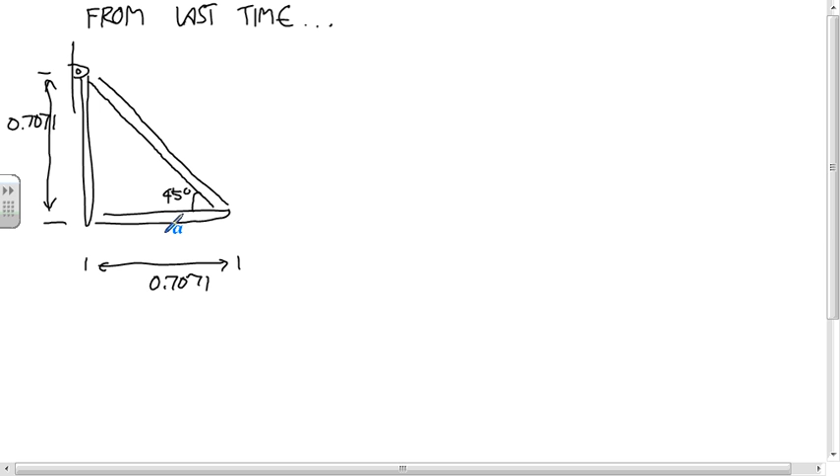Okay, so last time we had this problem where there was a pin joint connected to the wall, and this triangle was 45, 45, 90. The diagonal was 1 meter, so each of these lengths was 0.7071 meters. And the other contact with the ground was a roller at the midpoint here. And we're trying to calculate all these reactions.

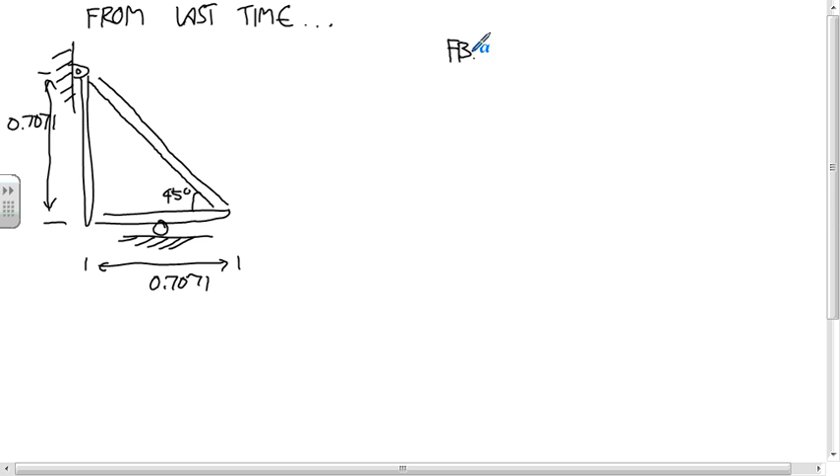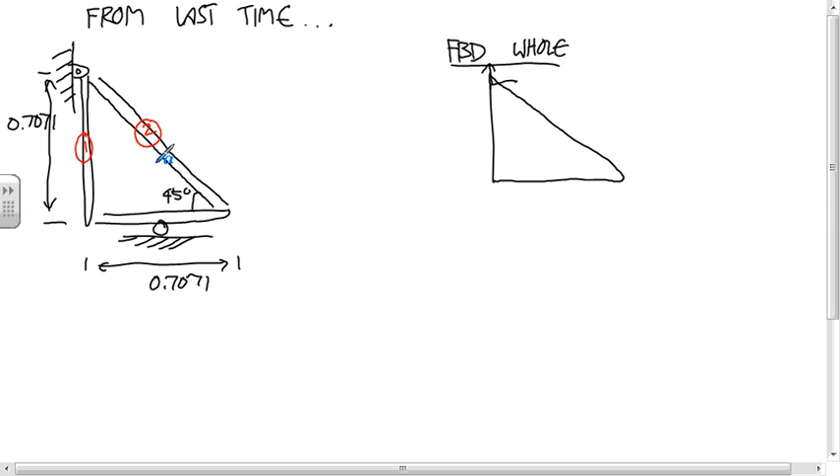And the first thing we did was we isolated the whole body. And we called this force, let's renumber the bodies. So this was 1, 2, and 3. And this was A, B, and C. So someone tell me if, look back, was this called RB, I assume? Yeah. Okay. And then the bottom one was just R. And then there was also this force this way of 5,000.

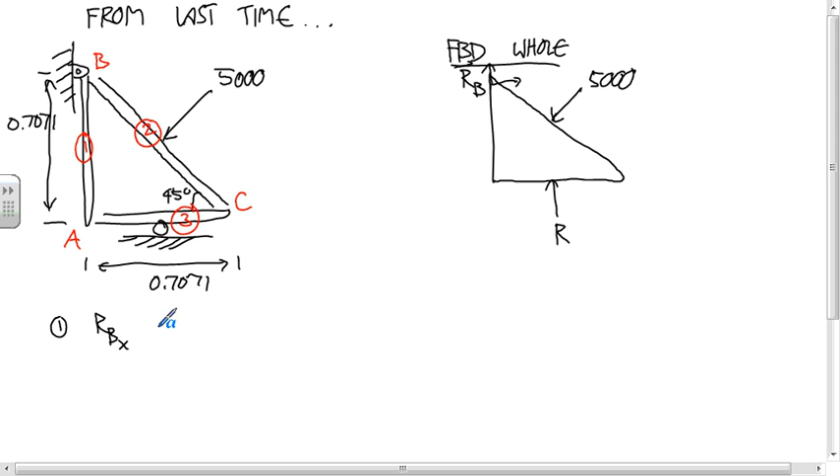And we came up with all those equations, right, last time. Can someone tell me what those first three equations are? Zero, 0.3535R. Okay. So there we are. We have three equations, and our variables are the vector RB, the scalar R, and that's all. So we have 3 and 3. We should be able to solve this.

Does that mean we're done with the problem? No. How do you know you're not done with the problem? Well, what we're trying to do is find the external loads on each of these members. And if you tried to draw a free body diagram of each of these members, you'd end up with forces in them that are not in our list. So we just don't have enough yet. We could solve this and then have a smaller system of equations when we try to solve the structure. But I think I'm just going to leave these as the first three equations, these as the first three variables, and just keep going on with it.

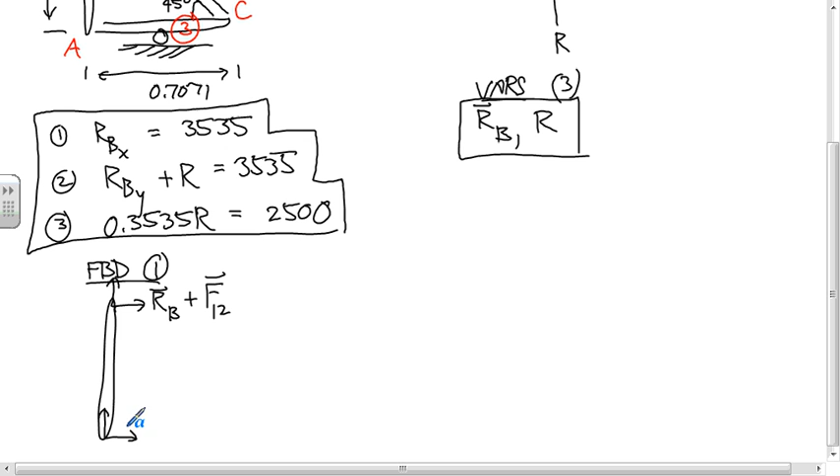And then at joint A, what member is the pin connected to? Yep. So here you have the force on 1 by 3. And that's all. Nothing else is touching that pin.

This one is one where, if I was doing this, I would probably skip doing the table. You can do it if it helps. You can skip it if you don't need it. In this case, if we make point A the about point, there's no moment produced by F13. And the moments produced by the forces up here are only produced by the horizontal component, and the moment arm is just the length of this. So it's not very hard to calculate that. But anytime you're using Newton's second law on a rigid body, you can write out that table. And you've seen the lengths of the tests. You should have plenty of time to write out the tables anytime you want. So let's write it out.

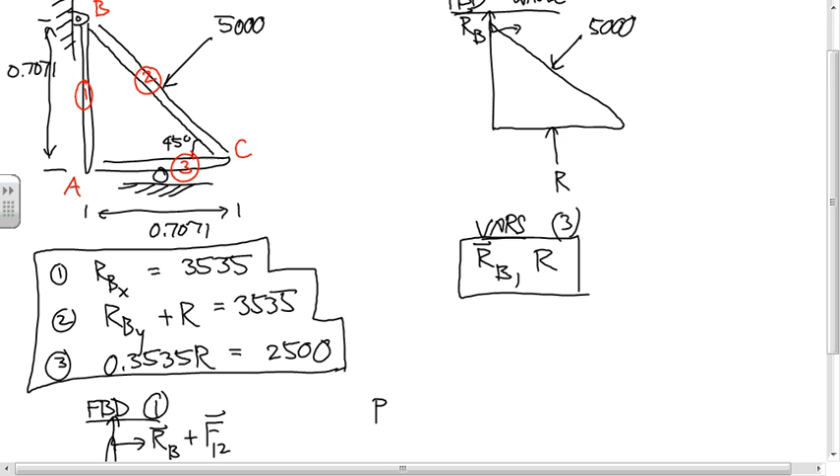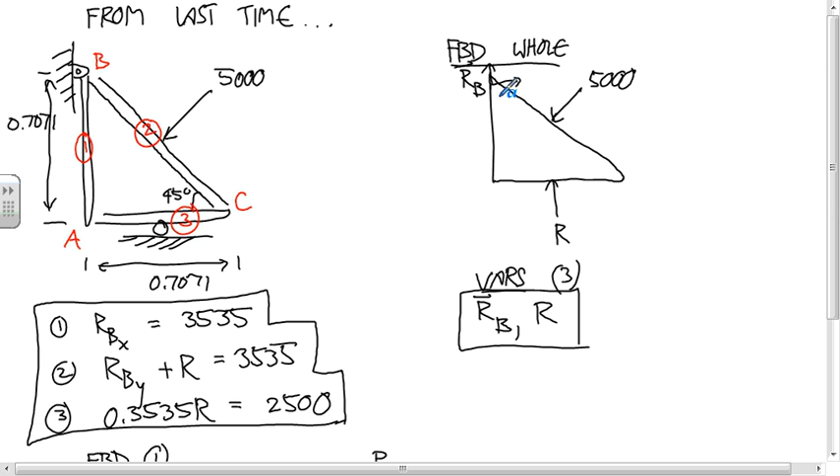Where do you get RB from again? Sorry. RB is the force on the structure by the wall. Okay? Oh, I see. In other words, it's a force applied to the pin by the wall. So the half-frictional, half-normal force? Well, in this case, it's a pin joint. Right. Okay. And so basically, you can think of it as the bracket that that pin goes into is applying a horizontal and a vertical component of force to the pin. And the pin's part of member 1.

Let's put the origin down here. I don't remember where we put it originally. Okay. So the force F13 is at the origin. The about point is the origin. So the rho vector is 0. The force is F13x and F13y. And the moment, take that cross product and it's 0.

And now the force up at the joint B, I'll first do RB. So the coordinates are 0.7071. The about point is zeros. So the rho vector is 0.7071. Force vector is RBx, RBy. And so you get minus 0.7071 RBx.

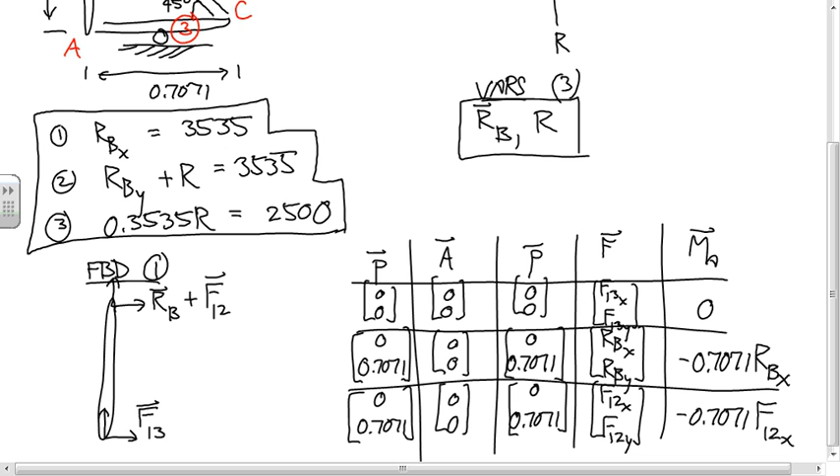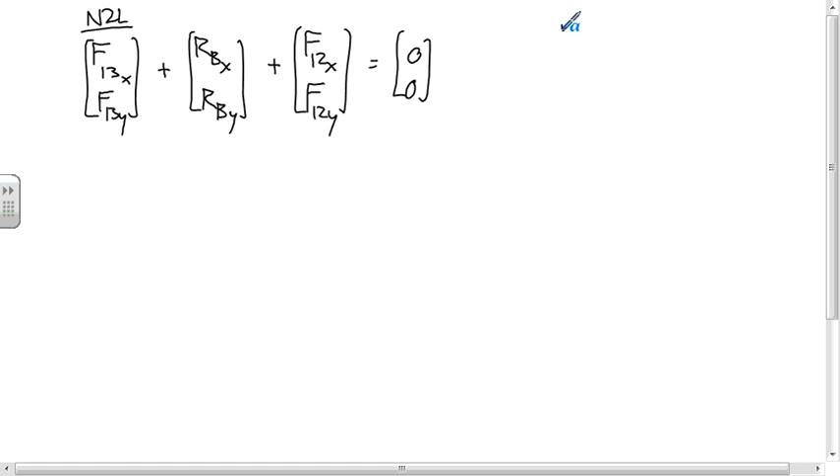So Newton's second law says F13x, F13y plus RBx, RBy plus F12x, F12y is equal to zeros. And then the rotational equation says

negative 0.7071 RBx minus 0.7071 F12x is equal to 0. And so equation 4 says, let's see, I guess I'll probably do it in order, F12 before F13. So I'll say F12x. Oh, we already have our RBx, don't we? So RBx plus F12x plus F13x is equal to 0.

Equation 5 says RBy plus F12y plus F13y is equal to 0. And equation 6 says negative 0.7071 RBx minus 0.7071 F12x is equal to 0.

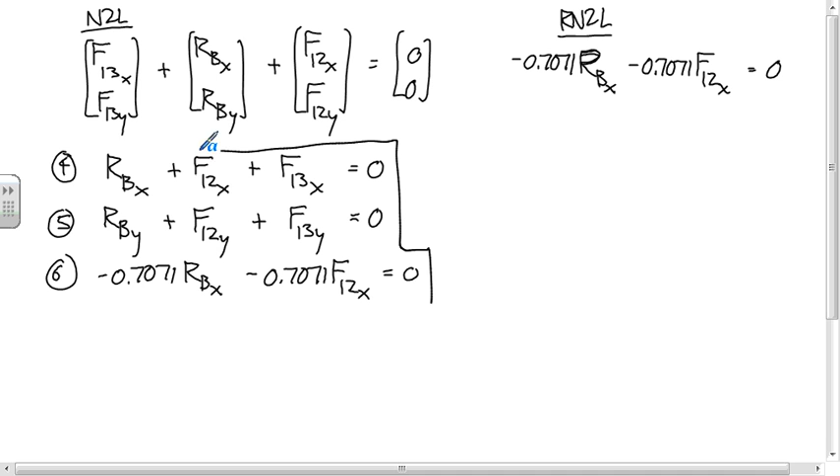So we have 6 equations, and the variables, we have RB, the scalar R, and now we just added 2 more vectors, F12 and F13. Yep, so we have 1, 2, 3, 4, 5, 6, 7 variables. So we're going to have to do another one. And so for this one, I suppose let's just do member 2. Based off of the information, how do you know you need another one? Because we have 6 equations, but we have 7 variables. Each of these vectors is 2 variables.

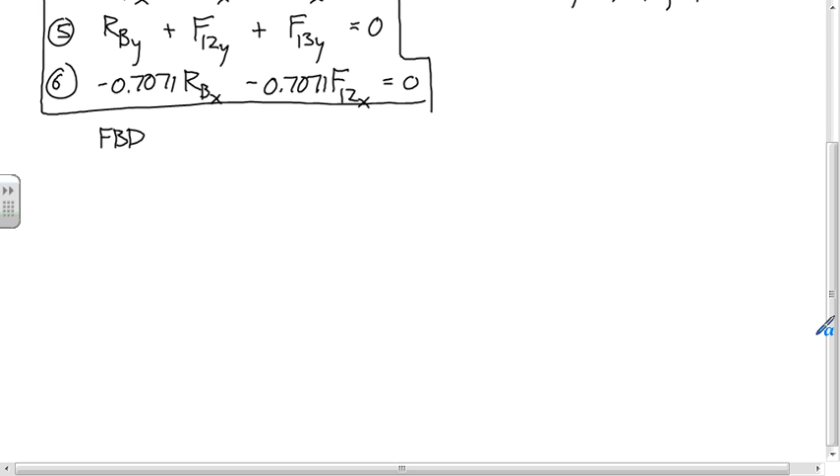So free body diagram of, well, actually, let's do 3. It's just a little easier to figure out what's going on. The calculations are a little easier. But it doesn't matter which one of these you do. Okay, so there are 2 joints here. There is the joint A and the joint C. What member is the pin A connected to? 1. So the pin is not connected to 3. And actually, in this case, there's no difference going to appear for either of these.

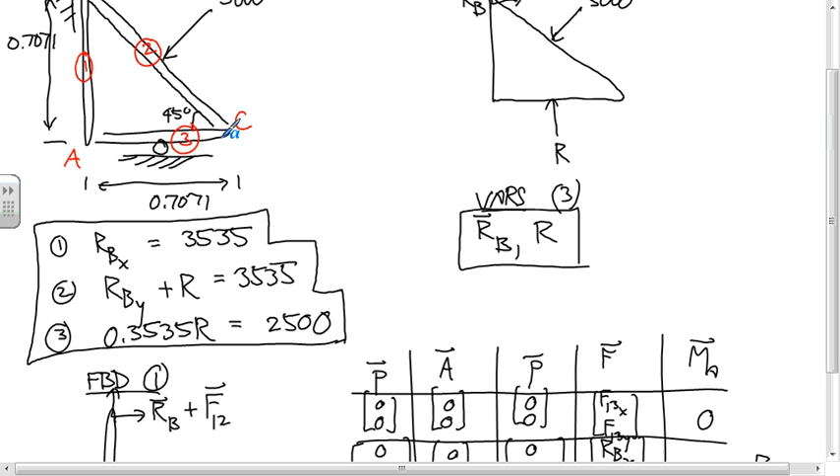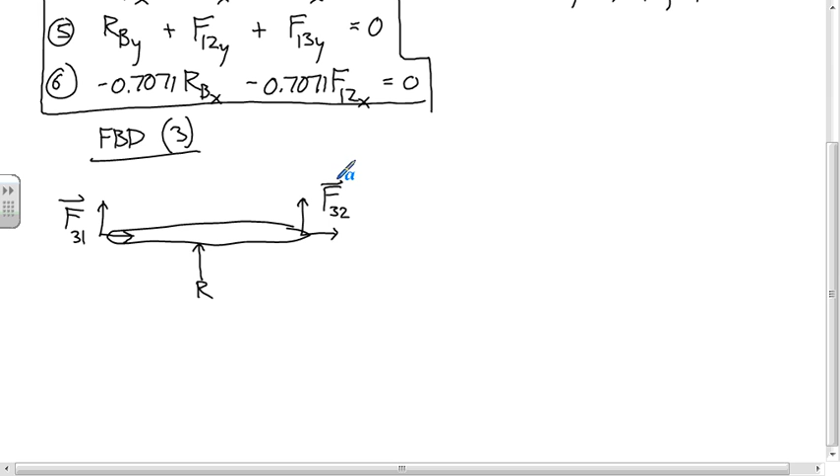But what it is, the force that we're talking about on member 3 by pin A, well, over here at joint A, is the force on 3 by the pin, on 3 by 1. And over here, the pin's connected to member 2. So we have a force on member 3 by the pin, by member 2. Okay. So here we have the force on 3 by 1. Then we have this upward force R. And then over here, we have the force on 3 by 2. So we can say the negative of F13. Yeah, that's great. So that's something you have to do somewhere in the step for this body.

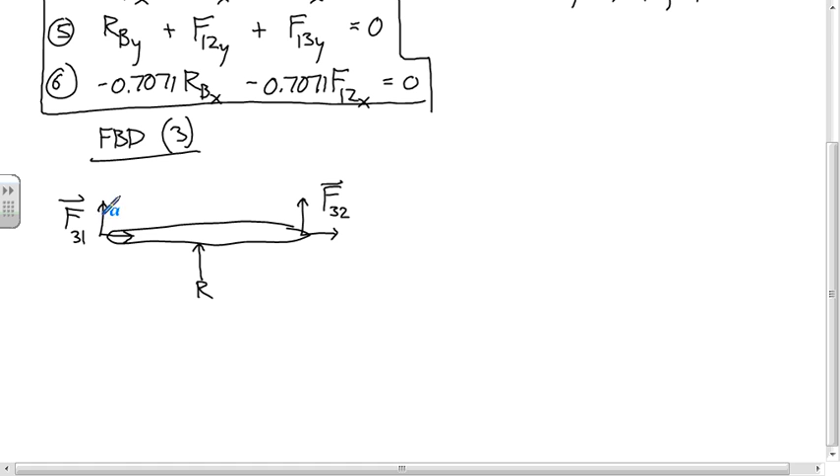So recognize that we haven't dealt with F23, so we can just leave this one F32, that's fine. But we have dealt with this one with the subscript switched. We have dealt with F13. So I'm going to just right now switch this over to negative F13. That's by Newton's third law. And so now we can go to the table. I guess I'll keep the origin and the about point still at that same point at joint A. So first, let's do this negative F13. r vector is 0. The force vector is negative F13x, negative F13y, and the moment is 0.

And now we'll go to R. The length of this whole thing is 0.7071, so the coordinates where R is applied are, the x component is 0.3535. The y component is 0. The about point is still 0. So the r vector is 0.3535, 0. The force vector is 0, R. And so the moment is 0.3535 R. Okay, so does it make sense that we got a positive moment for R? Yeah, because our about point is over here. That upward force R is going to make this rotate counterclockwise around the about point. And so that should be positive.

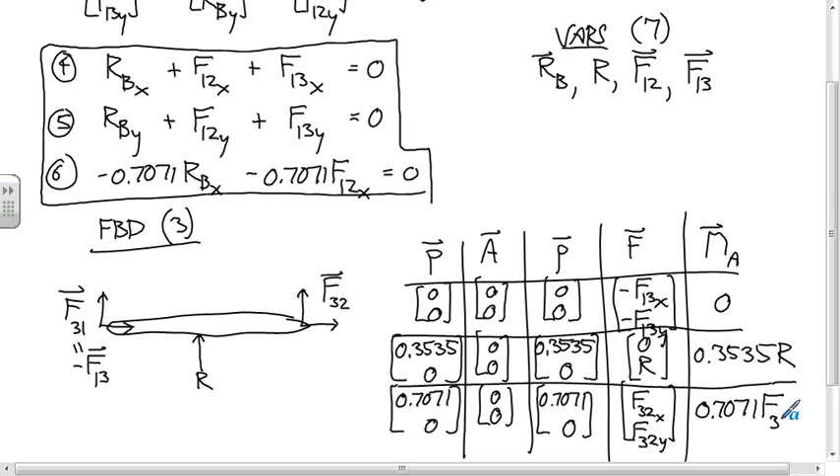Okay, so Newton's second law says negative F13x, negative F13y plus 0, R plus F32x, F32y is equal to 0. And the rotational says 0.3535 R plus 0.7071 F32y is equal to 0. Okay.

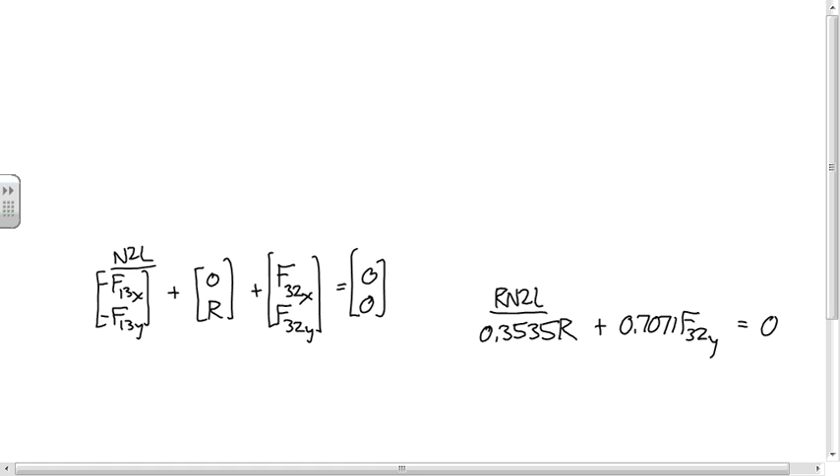So what equation are we on? 7? So equation 7 says negative F13x plus F32x is equal to 0. Equation 8 says R minus F13y plus F32y is equal to 0. And equation 9 says 0.3535 R plus 0.7071 F32y is equal to 0.

So we have 9 equations, and the variables, we have RB, R, F12, F13, and F32. So 2, 3, 5, 7, 9. So now we should be ready to solve it. Okay, so how many rows do we need? 9 rows.

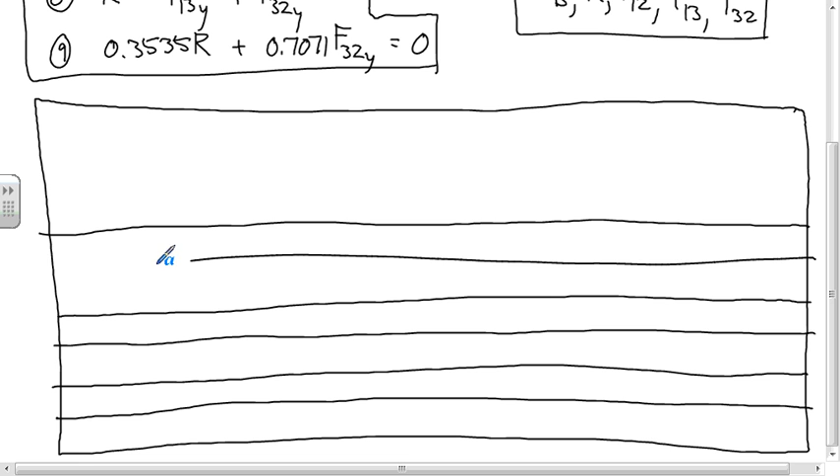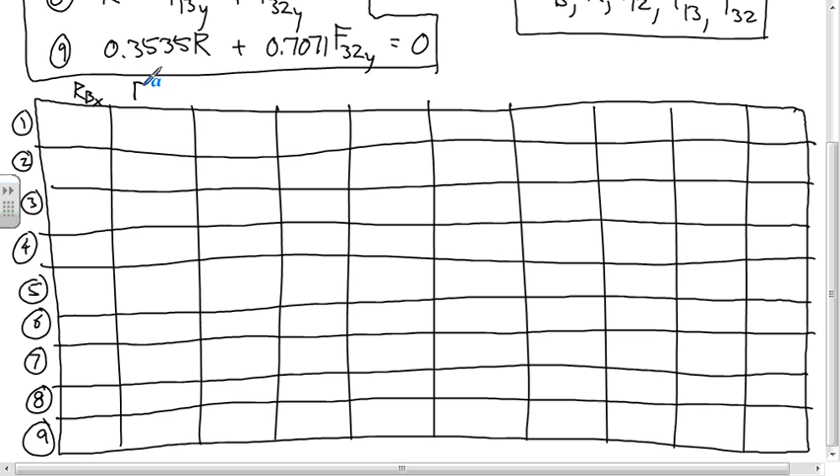Okay, so these are the 9 equations. And then we need 10 columns. And the columns represent RBx, RBy, R, F12x, F12y, F13x, F13y, F32x, F32y, and then the constants.

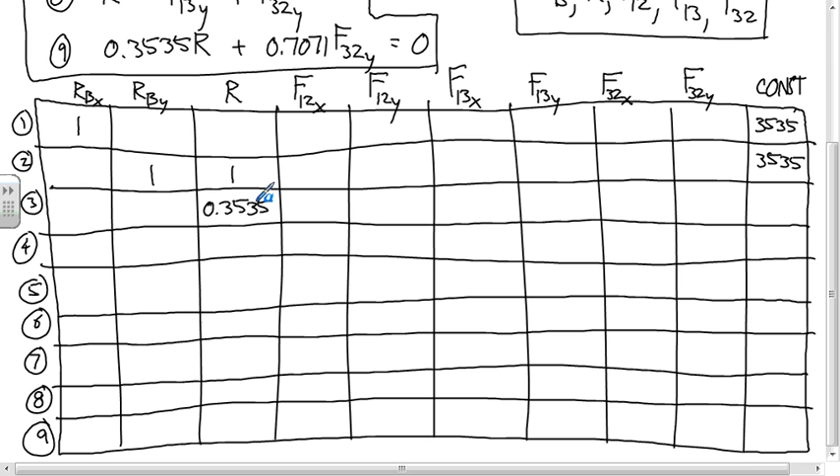Okay, so can you guys go back to equations 1, 2, and 3 and tell me what we have in those equations? Yeah. One of those, okay. And then there's a constant that's 3535. And there must be an R also, right? Not in the first one. Oh, in the second one, right. Okay, so, and then we have RBy, 1 RBy plus 1 R is equal to 3535. And then equation 3. We have a 0.3535 R. And 2500. Okay.

And now equation 4. We go to RBx. Okay. And then F12x. And then F13x. Okay. And then 5, we have an RBy. Okay. And we have an F12y. And an F13y. Okay. Number 6, we have a negative 0.7071 RBx. And then we have a negative 0.7071 F12x. Okay. 7, we have a negative F13x. Okay. A positive F32x.

8, we have a negative F13y. Okay. A positive R. And a positive F32y. All right. And then in the last one, we have a 0.3535 R. A 0.7071 F32y. Okay. So I do have answers for these. Why don't you take a minute and plug these into your calculator and compare your answers to what I got?